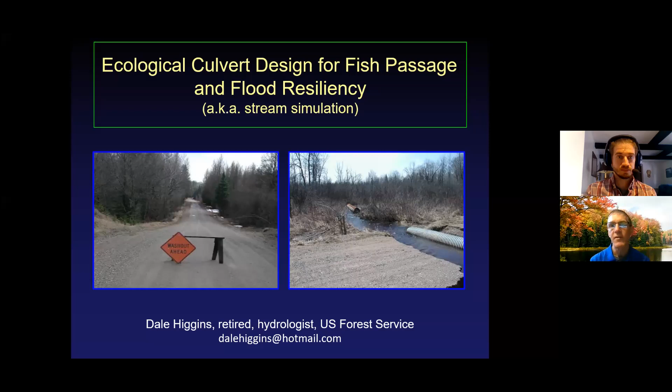And I'd like to start out with a little story.

Chris mentioned I'm retired, but I worked for 38 years for the Forest Service, and the last 20 of those on the Chequamegon-Nicolet National Forest in northern Wisconsin. My whole career worked on road stream crossing problems, but especially those last 20 years, spent a good share of time on those problems in northern Wisconsin in particular.

And so over that 20-year period, probably 7 or 8 years into that, we were replacing roughly 12, 13 crossings a year. I thought we were doing a fantastic job. It was a lot of work, kind of getting ready to pat myself on the back.

And then I did a very simple math calculation. I knew we had roughly 1,000 stream crossings, maybe more on the forest. So I took that divided by 12 and a half, and I came up with 80 years. So it struck me that our structures need to last 75 to 100 years at that rate. So the point is that...

I'm getting quite a bit of feedback, thanks. So the point is that any structures we put in the ground today, just from an infrastructure standpoint, need to last at least 75 to 100 years. So you've got to think immediately about lifespan, and they have to be flood resilient.

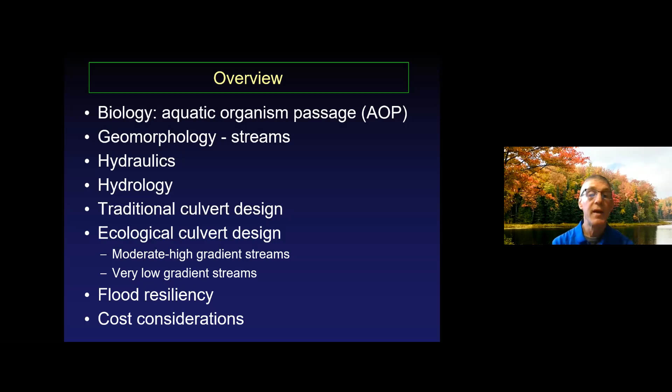We'll go into a little more detail on some design concepts for those two topics, touch on some of the flood resiliency aspects, and then just at the very end, no economist, but touch a little bit on costs. So I'll go ahead and get started.

Just talk a little bit about fish and aquatic organism passage. A few of these slides I borrowed a while back from Mike Miller with DNR. And the point is that species, whether it's fish or other species, they have a variety of needs to meet their life cycles. And rarely are all those habitat needs provided in one place. So they've got to move to get to them.

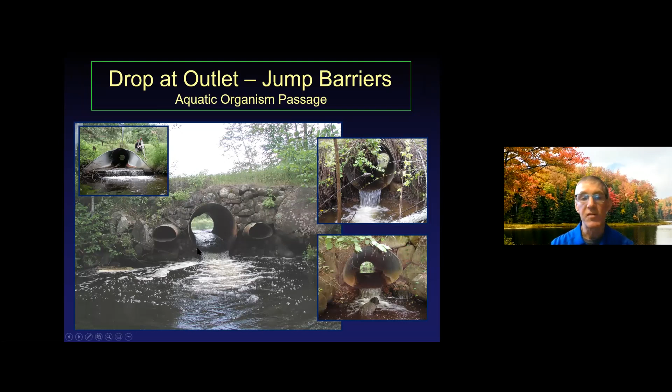And of course, that certainly applies to fish, aquatic organisms. And road stream crossings frequently become barriers for movement. Example here of traditional culvert design gave us a lot of these types of structures with a barrier jump at the outlet where species might have to jump that. Even if they can make the jump, the water in the culvert might be too shallow for them to swim through, or too fast.

The classic example of species maybe requiring to move are brook trout or other trout, game species that either need to seek out spawning grounds or colder water temperature or overwintering areas. But I'd like to, if you're not aware of some of these, broaden your horizons a little bit.

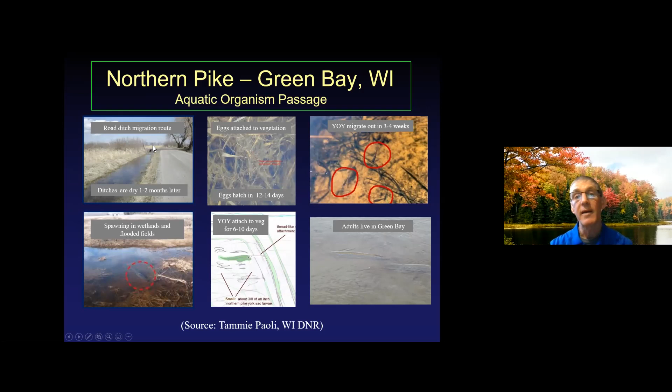Northern pike spawn up, move up ditches like these. They get into wetlands and flooded fields. They spawn. Eggs hatch in 12, 14 days. And then in 3 to 4 weeks, the young migrate out. Within a month, the ditch is dry for maybe 10 months out of the year. So it plays an important travel route for northern pike, not only out of Lake Michigan, but maybe this is probably happening everywhere.

So the take-home story is that we know a lot about fish and fish movement, but we don't know everything. We keep learning more. But species really determine when they want to move and in what direction they want to move. So I always feel like we should provide them the opportunity to move when they want to move. The same thing applies maybe to turtles.

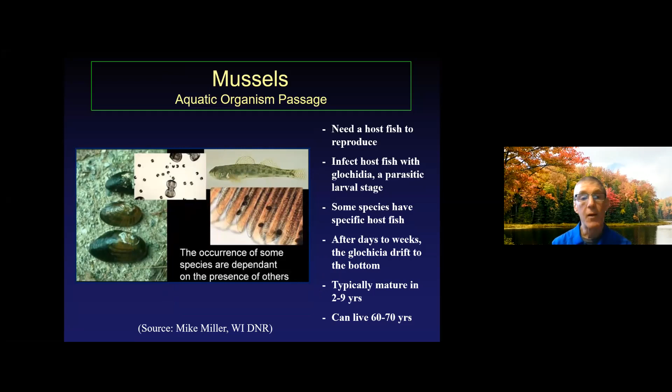They need to move, and if they can't get up through a culvert and get forced up over the road, especially in areas with high traffic, it can become a killing field. Species you don't think about moving are mussels. They're pretty sedentary, but in their life history they expel something called glochidia, which attach to the gills of fish, and then the fish can move upstream. Eventually they'll drop off and mature into adult mussels.

So a whole variety of species move. There have even been examples of mayflies, amphipods, and snails moving upstream. The bottom line, I think, is the best way to look at it is to provide them the opportunity to move when you can, and let them decide when and what direction they're going to move.

I want to go back to that first slide where I talked about the need, from an infrastructure standpoint, for structures to last 75 to 100 years. If we put in a structure today, it's going to be out there for another 75 to 100 years, and if we don't get the aquatic organism passage right, those critters in that stream are going to live with those consequences for a long period of time.

Okay, so next I want to move on to stream geomorphology, and there are some important concepts we need to consider as background for later in the presentation. I want to start at the big scale and talk about the fact that stream networks develop in watersheds in response to geology and climate. Geology is kind of the template the stream network develops in. Climate provides the water, which produces runoff, which runs downhill, right?

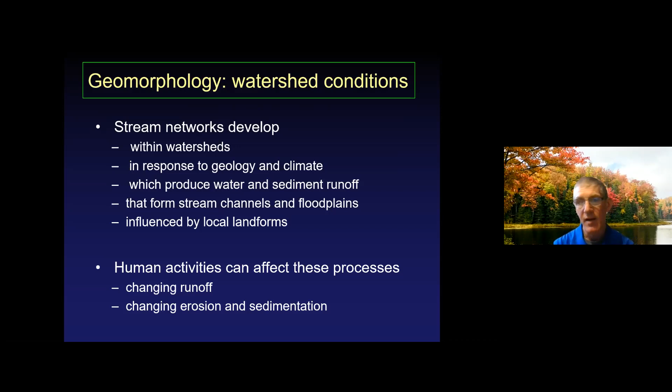But not only does water runoff form channels, so does sediment movement. So the combination of water and sediment runoff works to form stream channels and floodplains. Just a simple overview. So if we step down to the stream level, I want to emphasize the importance of streams not only moving water, but sediment and even wood and organic matter. In doing that, they form and maintain stable features.

You'll hear the terms dimensions, patterns, and profiles. Dimensions would be, say, if you look at a stream in cross section, the width and depth of the stream, maybe the width and depth of the floodplain. Pattern would be sort of the plan view of a stream: is it very sinuous, or is it straight? Does it have a very narrow floodplain? And then the profile would be the slope.

So a key feature, a lot of you are probably familiar with this, is the term bank full flow and bank full channel characteristics. That's a key concept I'm going to use in ecological design. So what are we talking about in terms of bank full flow? It's probably the flow that is most important in forming and maintaining the channel.

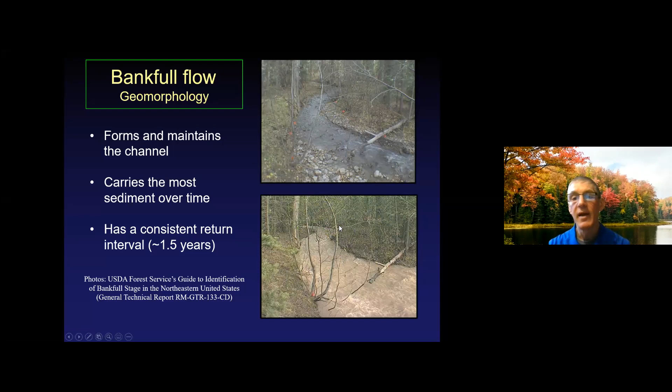Here's an example of what we're talking about. It's defined as just filling the channel before it flows over into the floodplain. So if you can see the flags in this example here, that would be your bank full channel. So we're at low flow. Usually one good place to see it is on a point where you come up and then it flattens out onto the floodplain. So here the stream is just about at bank full flow.

A couple other examples of how to identify bank full. It's that first depositional flat adjacent to the main channel where the stream will start to flood out. So here's an upland situation. You come up this bank and all of a sudden there's a break right along here and you'll have this flat. That would be the floodplain. This would be your bank full elevation, or at least the first point you would look at.

Here's a diagram of what that looks like in cross section. So here's your bank full stage and bank full width, channel width, and the flat adjacent to it - that's the floodplain. You can calculate an average bank full depth, area, and also maximum depth.

If you're familiar with Rosgen's stream classification system, you'll hear the terms flood prone width and entrenchment. Flood prone width is, as a rule of thumb, take the maximum bank full depth, double it, extend a line across to where that intersects with the uplands - that's the flood prone width. Entrenchment, which is a value a lot of people use, is just this flood prone width divided by the bank full width. So it's how wide the floodplain is in terms of bank full width. In this case, it's probably about 2.

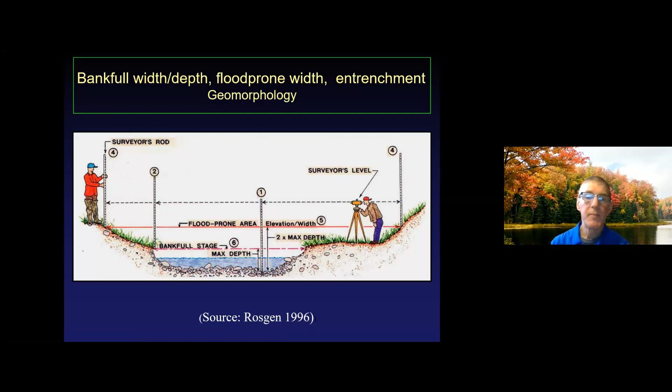So enough on channel geomorphology, just quick background. I want to touch on some culvert hydraulics to make sure we all have a common understanding of a few terms.

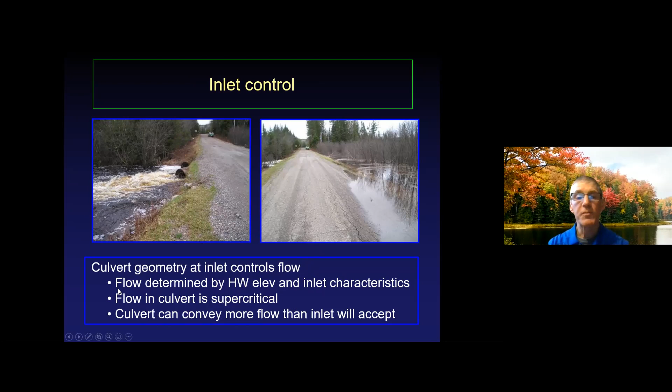In terms of culvert hydraulics, you'll hear the term inlet control. That means the only thing determining flow through the culvert is the headwater elevation and the inlet characteristics. Flow in the culvert can be supercritical, and usually the culvert is set at a steep slope, meaning the culvert barrel itself can convey more water than can get into the inlet. So if you're thinking about pressure on your road crossing, abrasion in the pipe, or fish passage, supercritical flow is a problem.

Outlet control is kind of the opposite—the tailwater really determines the flow through, along with a number of other characteristics. Flow through the culvert can be subcritical, meaning the inlet can convey more water than is flowing through the barrel. This is certainly the type of thing we'd like to see for aquatic organism passage.

A couple notes on hydraulic analysis—I don't have time to go into much detail, but this book, Hydraulic Design of Highway Culverts, Hydraulic Design Series 5, or HDS 5, is like the old Bible. It goes way back to the 1950s and has been updated several times, but that's what was used before the advent of computers and computer models. A lot of this still forms the foundation for those computer models, which are basically just computerized solutions using these same techniques.

There are a number of models available. Before today's computers, HDS 5 had nomographs you could use to help solve for inlet or outlet control. Now there are a number of computer models—I'm going to talk briefly about one, HEC-RAS. The U.S. Army Corps of Engineers has a Hydrologic Engineering Center, that's the HEC part; RAS is a software package called River Analysis System. They have a number of really good software packages in the public domain, and this is one that's commonly used. It's a floodplain modeling program, but it has really good routines for culverts and bridges.

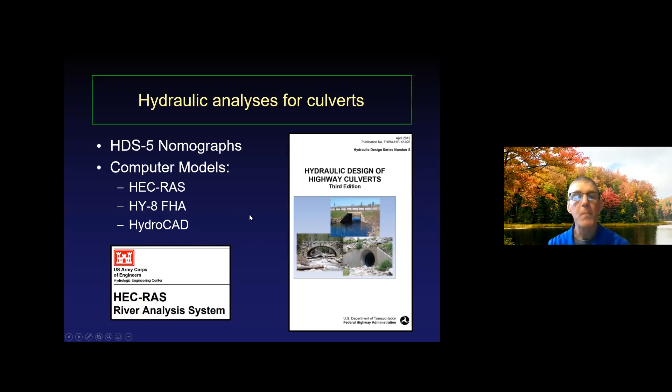As you're putting your geometry data in from your survey, you put in the elevations for the culvert, and you also have to pick your culvert size. As you're picking those, there are actually links back to these chart numbers, so you can make sure that the structure you use fits quite well.

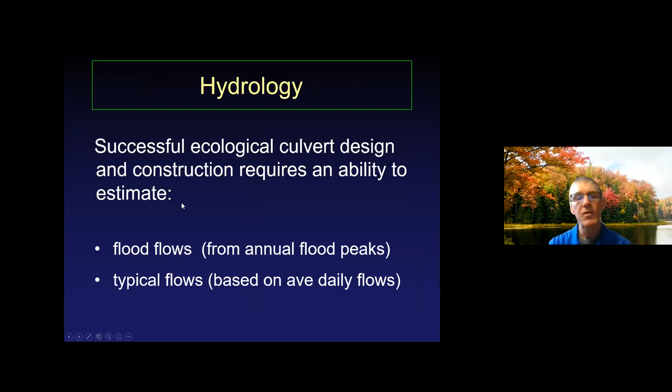I'll throw construction in there too. You need the ability to estimate some flows, in particular flood flows, but maybe in other cases, more typical range of flows, especially for bypass pumping or something. So just a little bit of background work.

There are two basic ways to estimate discharge at your road stream crossing site or any other site. One broad category would fall into what I'd call rainfall runoff modeling.

That's where you pick a design storm, a rainstorm, which could be a 25, 50, 100-year event. And then with rainfall, you also have to think about, well, what duration? Is it a 6-hour rainstorm, 12, 24, etc.? And then you can get a design rainfall amount. You drop that on a watershed, figure out how much is going to run off, and you can get a peak discharge from that, and even a runoff volume, and then you model that, size it. There are some really good methods, so it's a reasonable way to go about it.

But the one drawback to me is that it doesn't take into account snow melt. It doesn't necessarily take into account 2 or 3 or 4 or 5 days in a row of 2 to 5-year storms. So the other approach, which I like to use and will talk about, is basically transferring data from streamflow gauging stations, because that's really what you're interested in: observed flood flows. I'll get into that in a lot more detail.

So that's all I'll say about rainfall runoff modeling. I'll cover this other aspect today.

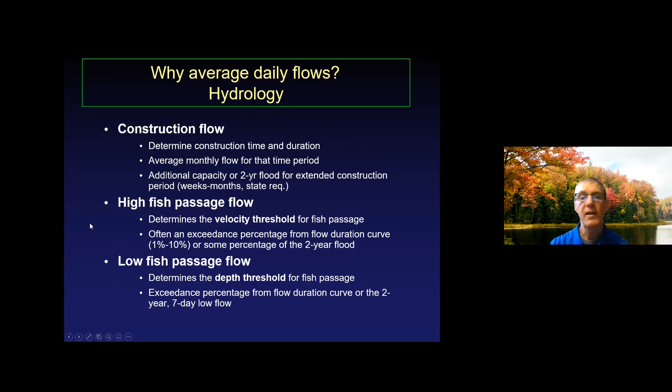We may or may not need average daily flows, but one area you might use them is if you're thinking about construction and what kind of bypass flows we may have, accommodating that with pumping, a diversion pipe, or diversion channel. If you want to do fish passage modeling, we won't spend time on this now, but later John Simonson will talk about inventory. If fish passage is a concern, sometimes it's obvious whether you have it or not, but some cases are indeterminate, so you can do modeling and need to pick out flows to do that.

So how do you transfer flood flows from USGS gauges to your site? Sounds like a lot of work. The good news is the U.S. Geological Survey, who operates all the gauging stations in the country, has already done the vast majority of the work for us. At every one of their sites, once they have a sufficient number of years of data, they'll do a statistical flood frequency analysis, identifying what the 2, 5, 10, up to 100-year flood is.

So how do you extrapolate that? They've developed methods for doing that too. They delineate every watershed and determine a number of watershed and climatic characteristics. Then they perform a regression analysis to predict flood flows from those climatic and watershed variables, regionalized by state. So they've done all that for us, which really simplifies our job.

In addition, they've developed a computer program that solves the equations, containing all the equations for a state. It's called NSS, and you can download it right here.

As they do these analyses and develop equations, they typically do it state by state. As they update the equations—this one is from Wisconsin, 2003—they describe all the gauges in the state, their statistical analysis, the whole works, everything is here. So if you're going to use these regression equations, it pays to get these publications, look them over, and make sure you understand the limitations and assumptions. Again, from this website, you can download the publication.

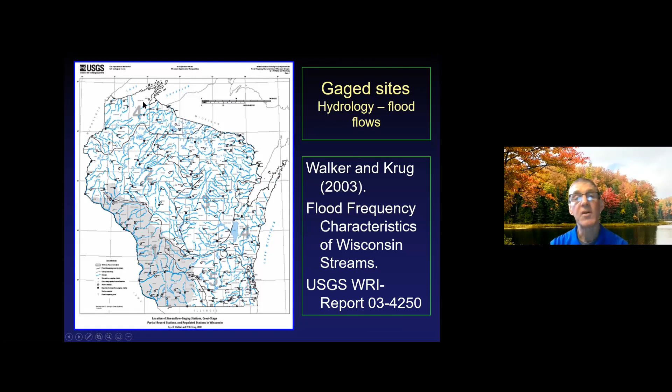Here's an example, still from 2003, a map of the state. The open circles are partial record crest gauge stations—there are a lot more of those because they're cheaper to operate. Then there are some continuous recording stations. You'll notice the state is broken up into 5 regions, because regionalizing gives better regression fits, so they have separate sets of equations for each region.

One nice thing about this statistical approach is you can plot these up. This is an example for Brookside Creek and Brookside Road near Green Bay. Because it's a statistical analysis, they also publish the standard errors, so you can plot those too, giving you some sense of the potential error in your flood flow estimates. So beware of those standard errors and the possible error in your prediction.

I mentioned I like these regression equations—I think they have the potential to be a lot closer to the true value compared to rainfall runoff modeling, but you can still have fairly substantial errors. Be careful, because in those publications they'll state the range of data used to develop the equations, and your watershed may be outside that range, which increases the potential for error.

One last note—a lot of them, like Wisconsin, start at the 2-year flood. I like the 1.5-year flood, so I simply extend the line down to get the 1.5-year flood. Quick and dirty way to do that.

So how do you go about using regression equations? Pretty simple and straightforward: you delineate the drainage area, determine the watershed characteristics, and solve the regression equations. In the old days, you'd have to get GIS layers, delineate the watershed, and overlay it with the watershed characteristics needed for the regression equation. Then you could solve it with spreadsheet equations or the NSS program.

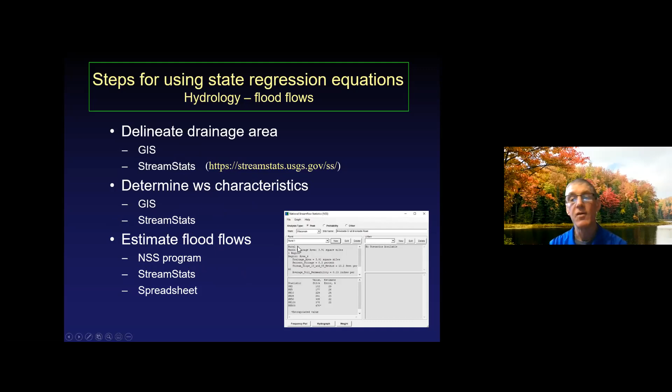Some states will even solve the equations. Wisconsin's not there yet, so you still have to use this NSS program on your desktop or a spreadsheet, something like that. But pretty simple and straightforward.

Here's an example, that Brookside over by Green Bay, a long, narrow watershed delineated the old GIS, 3.9 square miles, for the regression equations for that part of the state. You need storage, channel slope, soil permeability, and mean snowfall, which you get either off the maps or from the publication.

This is just an example of what a few of the equations look like. Every area has its own set, with equations for the Q2 through the Q100. So you need area, storage, slope, soil permeability, and snow for that particular site.

The solution: the 100-year flood was 380 CFS, and you can see the other numbers here. One thing I like to do, and it's a little crude, there are a few things you still have to take into account, but I'll divide that by the drainage area to come up with almost 100 CFS per square mile.

So as I move around areas of the state, I get some ideas - is it a flashier or more stable system? And I have some other examples like that for you to see and think about.

So the next thing I want to do is hydrology. You may or may not want to do this, but it's something else to think about, and it gives you a feel for the hydrology system. So say you want to think about bypass flows during construction.

So the thing to do is the obvious thing: when will construction occur? Do we know? Because flows are seasonal. Determine the length of construction - can you get in a day or two, or is it going to be a month-long job?

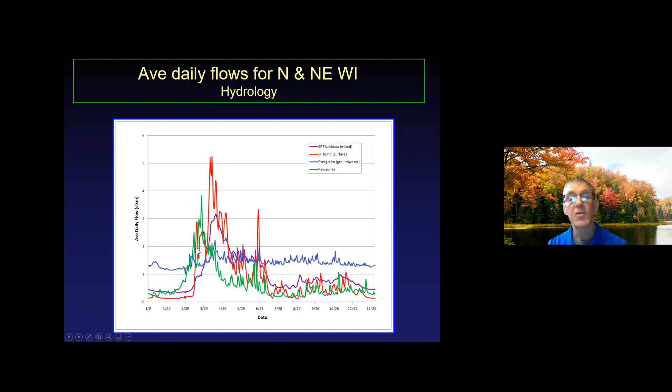Similar to the mixed type, except it peaks a little lower, or about the same but a little earlier, which makes sense given it's a bit further south, and the base flows are a little lower. You can use this to get an idea of the construction period flows per square mile, multiply by your drainage area, and it gives you a starting point. Here's an example that generalizes monthly flows by averaging a number of groundwater fed, mixed, or surface systems, or 4 gauges in the Green Bay area.

For that Brookside example, say our construction was going to be in July. If it was later, you might even have lower flows on average. So at a minimum, we'd want to be able to handle about 1/4 CFS per square mile times almost 4 square miles. That's a good starting point, almost 1 CFS.

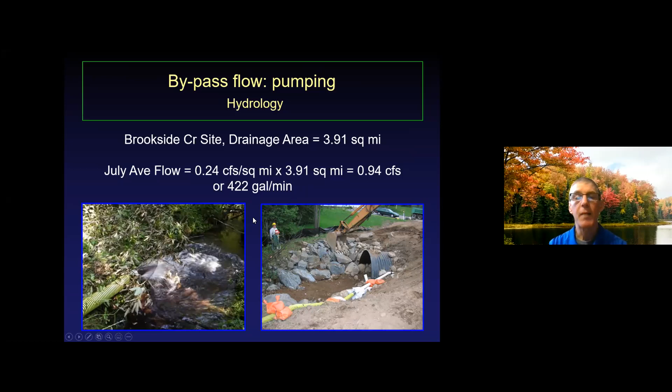Or if you wanted to pump, say it's a small system, you can get in and out in a few days. Maybe you need a pump that would do at least that, with more reserve capacity in case flows are higher at that time of year. Certainly as the construction time approaches, you can adapt accordingly, but it gives you a starting point.

Another example: say you're going to be there for 3 weeks or a month pouring concrete and other things, and you think there's a good chance of storms and higher runoff rather than the average or base flows. Then maybe use regression equations for a 2-year flood, in this case 135.

So you're going to put in a diversion pipe and set it steep, and you're willing to, since you're only going to be there a few weeks, not worry too much about fish passage or abrasion, that sort of thing.

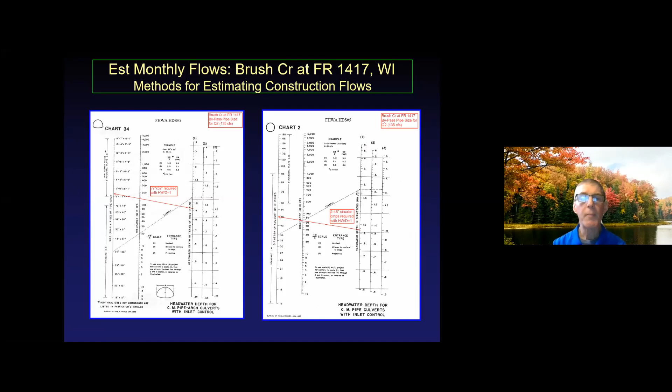You can also do some of this in HEC-RAS, but it takes a little more work, so it just depends on how much time and effort you want to put in. At least it gives you a starting point anyway.

Now the next thing I'll do is talk briefly about traditional culvert design. That's essentially based on hydrology and hydraulics: select a design peak discharge, and of course think about the headwater depth ratio. You get a survey, perform some type of hydraulic modeling to pass that design discharge, and ensure you meet your engineering constraints.

The other thing I want to mention is the importance of design standards and headwater to depth ratio. These are minimum standards, so they can go beyond this, but Federal Highway Administration uses a 50 or 25-year flood with a headwater to depth ratio less than 1.5 or 1.2, depending on road type and culvert size. Wisconsin is pretty similar, 25 or 50 year for streams, depending on road type, with headwater depth ratio less than 1.5 -- letting a pretty good head build up on the structure.

And then NRCS, Natural Resource Conservation Service, working with private landowners and farmers, uses 2, 10, and 25-year flood standards for forest access roads, farm driveways, and public campgrounds.

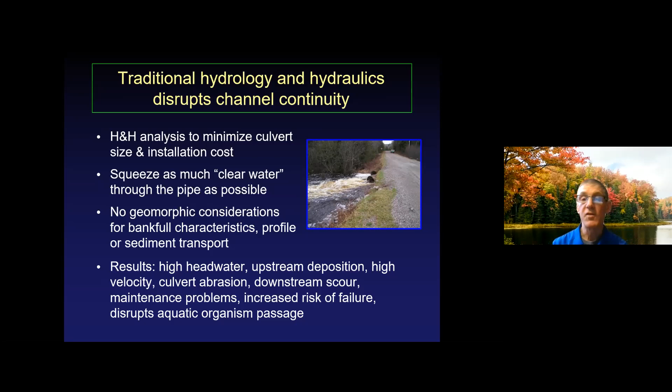So that leads me to, what's a culvert designer to do, a road stream crossing manager to do? What I'm going to say is use ecological culvert design, also known as stream simulation. Or if you want a corollary to H&H, I would call it BGH&H: biology, geomorphology, hydrology, and hydraulics.

So what's ecological culvert design? Simply: structure width greater than or equal to bankfull width, structure wraps around natural channel, passes all aquatic species and life stages, maintains stream continuity in terms of the movement of water, sediment, and even woody material. And that results in a very long-lasting, flood resilient, low maintenance structure.

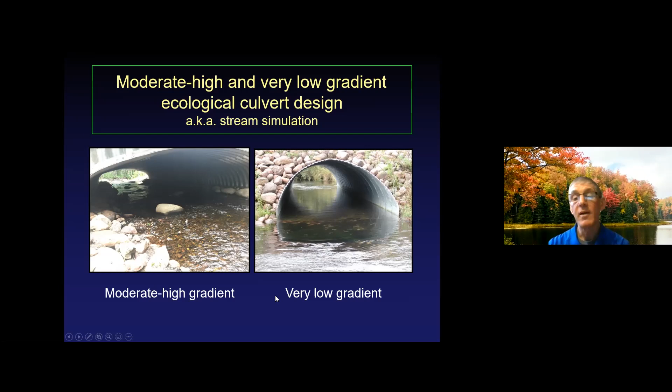So one of the things I'm doing, I've kind of broken this ecological culvert design into what I'll call moderate to high gradient streams, versus very low gradient. Classic stream simulation is like this: you build a stream bed through the structure, wrap the structure around it. But at least in northern Wisconsin, through trial and error and starting to work in this direction early on, we found that maybe on these very low gradient streams, you don't always have to build bed and banks through it. So what are the key considerations to separate those two?

Obviously gradient is one, but the key is that you have a natural backwater, tailwater, whatever turbulence through that backwater up through the culvert. The other key one is what kind of mobile bed do you have? If you have a mobile gravel bed, don't build the bed and banks through it. But if it's sand or organics moving through the end, and you have this natural tailwater, you might be able to get by with what I'll call the very low gradient approach. There's no exact slope breaks because it depends a lot on the details, especially the culvert length and the actual slope, but very low gradient you start getting below 0.5%, moderate-high gradient above 1%, and it depends on a lot of these details.

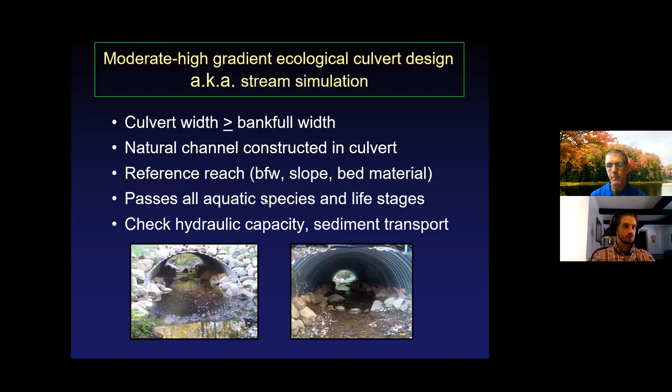So, to do any design, you need to do a survey, right? But from a stream simulation standpoint, we like to use the term site assessment. You can actually do an initial site assessment before you even get on the ground, using existing information, maps, books, Google Earth. You can learn a lot in a short period of time, so you know what to anticipate out there. Some of the examples I have here for a design are from a stream down near Platteville, Roundtree Creek. It was used for a design course down there for about 3 years.

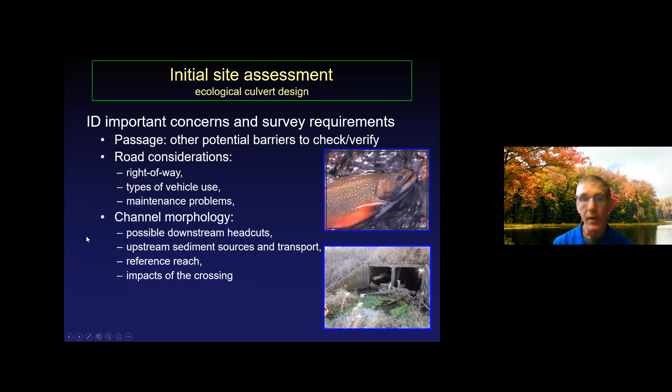And then also you can upfront start to identify important concerns, like passage, road considerations, channel morphology. If you can start to identify those upfront, when you go out to do your survey, you're more likely to collect data that will help you address those concerns. And then even early on, you can start to develop preliminary objectives for passage, road design, channel morphology considerations, that sort of thing.

So, you head out in the field to do your survey. A couple things you definitely need are a stream profile survey, and we're going to say 20 to 30 channel widths in each direction, upstream and down.

You need a number of stream cross sections. I'm going to say minimum of 5 for hydraulic modeling, more is better. And then also for your reference reach, you need at least one, and then some other bank full width measurements there. You need obviously some survey of your road, so you can do all the engineering aspects for the road itself, culvert replacement.

These days, almost everything's done with a total station, so you can get a good topographic survey around the crossing itself and then pick up all these other features.

The other thing I would highly recommend, and if you're like me, I'm not an artist, so I always want to resist doing this, but do a site sketch. And there are two reasons for that. One, it forces you to observe more if you're trying to draw something.

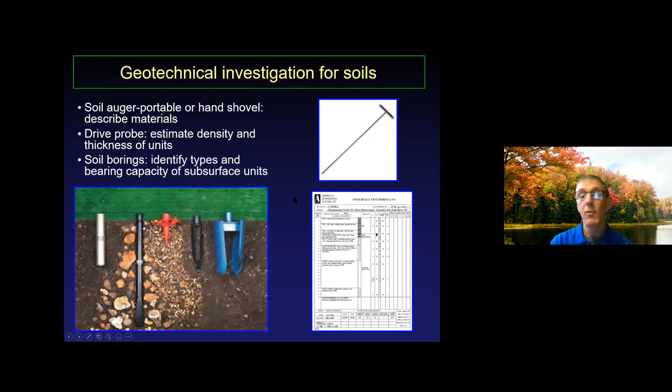I won't say much about geotech investigation. Sometimes you can do some initial stuff yourself, or if you know a soil scientist, some engineers, a geologist, they can help you look for some of these things that can be a real problem from a structural standpoint. The sooner you identify those things, the better. You can do that sometimes with a soil auger, hand shovel, there's even a drive probe you can use for some things. And of course you can step up to paying someone to do soil borings and geotechnical investigation, which for bigger structures is probably what needs to be done. Hopefully you have a structural engineer who can take care of that for you, or you can consult with one. So let's now step into some of the design aspects, but also include consideration of some of the survey details.

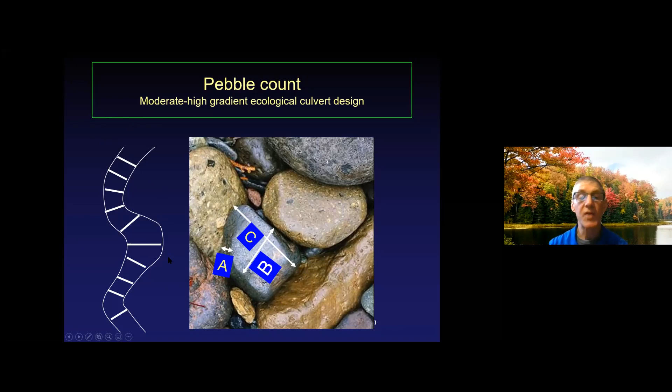So you systematically pick up 100 of these, measure this axis, and then you can plot a cumulative particle size distribution. Usually the measurements are made in millimeters, but you can convert those to inches. Then you can start to break this up into logical groupings and size classes.

So this first line is like 3/4 inch minus. You could bring this across and say, for our bed, we want 28% of our bed material mix, whatever volume we need, to be 3/4 inch minus. You always want at least 5% sand or finer so you can fill in some of the voids in the sub-bed, so the base flows won't go subterranean and become a fish barrier. Then you can say, we want 22% from 3/4 inch to 2 inches in size, 20% from 2 to 4, and you get the idea.

And then you can go to a quarry or gravel pit and specify the volume you need in all these different size classes for your bed mix.

The other thing you need to do is build banks. We won't get into specific bed features and all that, but you might need some larger stable material for the banks and some of the bed features that stay stable throughout the life of the structure.

So your first estimate is finding what are called key pieces. You want at least 10 of those, maybe as many as 25. Measure those, and it really pays to measure the A, B, and C dimensions, and they'll serve as your basis for the stable rocks in the structure.

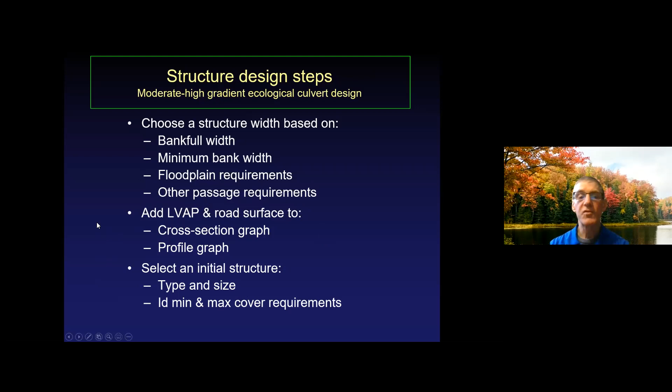We're going to look at something called an LVAP, lower vertical adjustment potential, in a few seconds. Select an initial structure ID or min-max cover requirements, where you can put your footer invert, verify cover, and think about your end treatments and the length of your structure. What kind of side slopes are you going to have? Are you going to have headwalls or anything to get your structure length? It's sort of an iterative process, and then eventually you do your hydraulic capacity check and your sediment mobility stability check, and you refine things as you have to.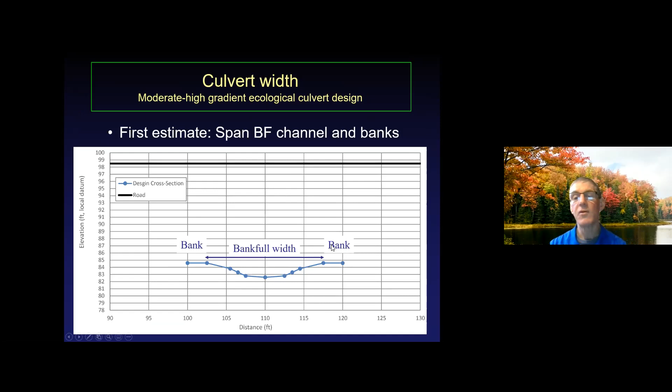Here's a typical profile from the reference reach, 15 feet wide. You want good stable banks, so maybe rocks up to 2.5 feet on each side, which gets us up to a 20-foot width there. So you can put the LVAP on here.

In this case, with this size structure, it seemed to make sense to think about some kind of a ConSpan as one option. Here's a 20 by 8 foot ConSpan that could be set on footers, in case you want the footer to extend below that lower vertical adjustment potential, come up to bank full.

So why bank full? Well, that way you can put in your footers and build this entire bed where it's open. You can get at it with an excavator, heavy equipment, much easier to build. You can build inside the structure, but it's easier, and then put the lid on, backfill, and that sort of thing. So it's a nice way to go.

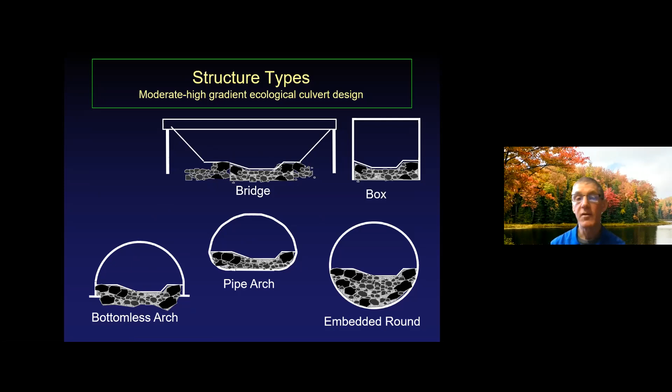Here's an example of that whole concept again, a lot of structures can work. This channel is identical in all these structures. What differs is maybe the amount of floodplain. As long as you meet your LVAP cover requirements, theoretically any of these structures could work. Two are bottomless, three have bottoms in there. So it's that idea of designing your bed, meeting your engineering constraints, and selecting a structure that works best, and maybe at least cost.

Some real life examples from Northern Wisconsin, these three have inverts and bottoms, these three do not.

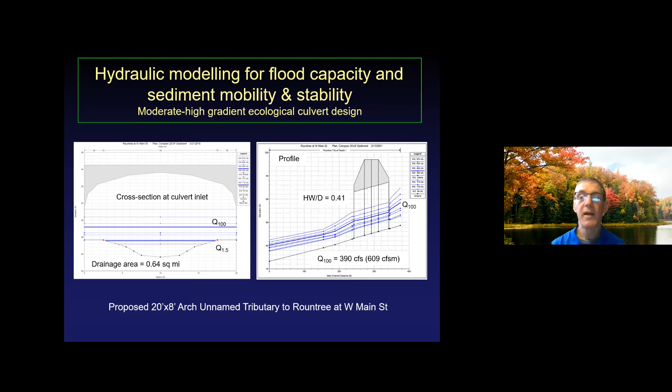And then you can use the hydraulics to do that sediment mobility, stability analysis I talked about. The idea there is you want your particles to be stable. The big ones have got to be stable across the whole range of flows. You want the basic bed, like when it starts to mobilize at whatever flow in the reference reach, you want it to mobilize in the structure too, so that it maintains that continuity of sediment transport.

So I have a summary here, but I'll leave that for your reference on the design steps, and then I'm going to move on to what I'm calling the very low gradient considerations and design.

So again, you might only want to do this where the stream is transporting sand and organics, not a mobile gravel bed. You don't want a culvert that's greater than or equal to bank full width. And if you're not going to build bed and banks through there, the idea is that the size of the culvert sort of acts as the bank, so to speak.

Got to get it set at the proper elevation, analyzing the stream profile. Part of that is determining that you have natural backwater that provides good depth and low velocity for AOP. I call that good D, low V for AOP. And then still verify hydrology and hydraulics at headwater depth ratio 0.8. You want to pass at least the 100-year flood.

And then while in some cases you may not need banks, there are times when you may need them, or you may wish to add them, or you may need to do some stream restoration also.

So from a site assessment standpoint, not a lot to say other than you don't have to worry as much about the bed materials if it's sand, but man, the profile—find a good reference reach for your bank full widths, and you really got to analyze that profile, especially for prior impacts. A lot of these existing structures have impacted the channel morphology upstream and down, so you got to consider that with your replacement.

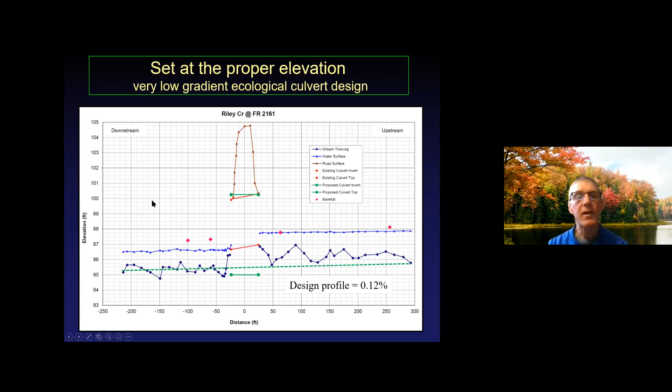So the culvert was both a constriction, I don't know if I pointed it out here, it was 68% of bankful, so that's constriction ratio. But it was also set high. So what would happen if we took that same culvert set lower? Well, you still see what the constriction does, and this is better. And this is better than some crossings I've seen, but still doesn't meet the criteria.

So even at a 2-year flood, the culvert is almost full, and as soon as you get above that, it starts to pond water back, and it had a headwater depth ratio of 1.5.

So if we go to bankful width culvert, just barely to the minimum bankful width, a little over 7 feet, all of a sudden we're passing that 100-year flood with a headwater depth ratio of 0.65. If you want to think in terms of flood flows, so pretty moderate flood flows, only about 25 CFS per square mile. And this is very typical in northern Wisconsin, where we have these sort of moderate 100-year flood flows, and we get a bankful width structure. Usually we will pass these flows with some freeboard here, in less than headwater depth ratio of 1.

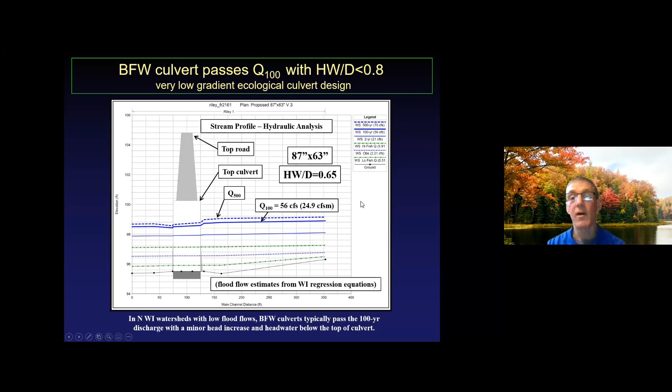Talk about skew again. Here's kind of a borderline situation, and the problem is in the connection between profile and alignment. We have a stream coming down here that follows the road, probably was channelized, put in a shorter culvert, turns, does a 90, comes through here, heads downstream. So the ideal thing would be, gosh, could we reconnect that? That would be a nice way to go. You have better alignment at the inlet.

The problem is you're going from, these were two 8-foot, 45-foot long concrete pipes with a rock head wall that was failing. They were starting to separate. So the problem is all of a sudden we have to go to almost a 100-foot culvert. And then, do you need to build a stream bed through it? The conclusion was, yes, we would have had to.

If we tried to put in a flat culvert, it would have been buried too much here, causing a head cut upstream. We were at that kind of break line on a slope of 0.6% using the water surface. If you set the culvert at a slope, it would have been too shallow here if you're thinking this is a stable grade control. So you either do this, build a full bed through it, a long culvert, more of the stream in the culvert. This channelized section looked like that was pretty stable.

So the other option was the gradient's pretty low through here, 0.17%. That's actually because we weren't aware of any kind of woody debris problem. We went with a 31-foot box culvert right here, 16-foot versus the two 8-footers. So those are the kind of trade-offs you have to think about and you have to make, and you got to tie in the alignment with the profile.

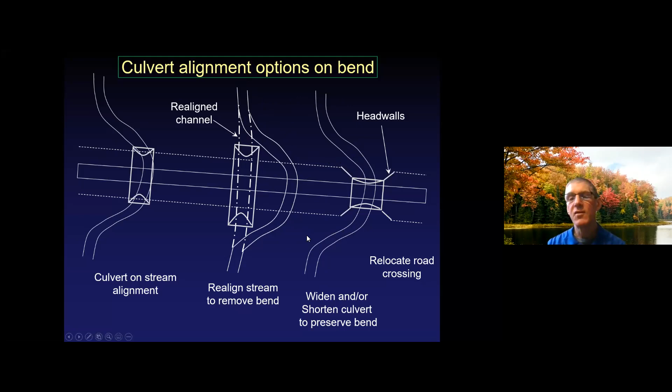You think back to that Lane diagram. If you increase the slope, what can happen? You can cause degradation or a head cut moving upstream. That's what I talked about in the last example. This is pretty good if you can't relocate the road. Ideally, you'd like to cross at a straight stretch. Sometimes you can't do that. This is a nice option, if relocating it isn't feasible.

Here's an example of that. Here's right on a very sinuous, larger, low gradient sand bed load stream, right on an outside bend. Culverts are failing. There were 3 culverts and a head wall. And so no opportunity to relocate the road because of some private cabins nearby. So this box culvert was put in. It's very short, only about one bank full width long.

And so it doesn't really constrict the sinuosity of the channel that much. And what happened was the stream actually builds a point bar on the inside bend, scours more on the outside, can move that sediment through. So it really maintained the continuity. I think the fact that it's so short really makes a big difference in that it spans bank full width. So I mentioned, in a lot of cases on these very low gradient streams, you can get by with the sides of the culvert as sort of the bank. Here's some examples of that, no structure inside it.

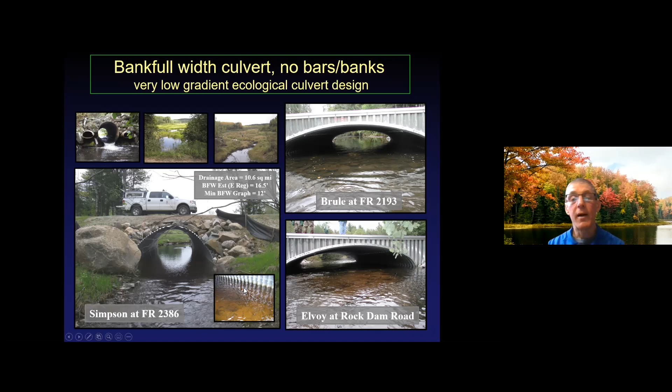As an aside, talk about stream restoration. This old crossing was not only a fish passage barrier, but was ponding water upstream, was class 2 trout stream. You can imagine the water temperatures up here. By putting in larger culverts at lower elevation, restored almost a half-mile of stream, reduced water temperatures, all for the cost of a road stream crossing replacement. Here's this idea, low D, good, or good D, low V for fish passage.

So keep moving here. If bank full width is good, is wider better? Well, not necessarily. Maybe if you're not going to build banks through the structure. Where you have a mobile sand bed, when it moves into a structure, if you don't have banks here, it spreads out uniformly. Here's a good example of that, straight, uniform. And if you have low flows, a real wide structure, that shallow water can impede fish passage. So we certainly don't want that to happen.

Another example in southern Wisconsin: a just under 12-foot bank full width stream moving a lot of sand. You come into this bridge, 16-foot wide, so it's quite a bit wider than bank full. That's good from a flood capacity standpoint, but you can see what happens because of the shade: you don't have any vegetation growing, which is what provides stability for the banks. So the sand spreads out uniformly. It's kind of hard to see, but if you follow my mouse pointer, that's all exposed sand, and there's some over here too, extremely shallow.

So nothing wrong with the span itself, I like the span. I just think building some rock banks through, or some other rock structures, to form a low flow thalweg would be the solution to that. Here's an example of that.

We've got a few cases where we had a co-op project, highway culverts 100 to 130 feet long, 7 to 8 feet, with small groundwater fed streams connecting up to the North Branch of the Oconto River. So we were concerned about that happening, and what we did was build rock structures and tried to place them thinking about scour and deposition, to create some differential scour and deposition around these structures.

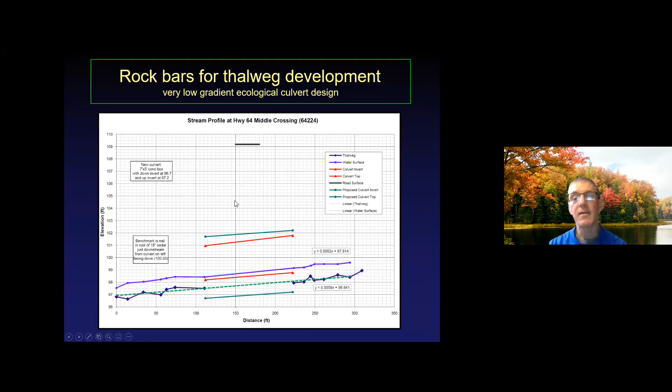Here's an example of one of those sites, culvert before and after, with the sand bed. In this case we set some of the culverts on these very low gradient streams. You have a 50-foot culvert - it's not worth setting at a slope, I don't think, because you're only talking about 5 to 15 hundredths of a foot. But as culverts get longer and the slope increases a little, we were right at that break point, so we did set this one at a slope.

Last topic here is identifying issues up front. This is a cooperative project with two different agencies - a highway culvert at Turtle Creek where not only fish passage but animal passage was identified as an issue by Forest County Potawatomi. They wanted mammals, even possibly deer and bear, to move through here. So 4-foot banks were designed into the structure to provide that opportunity. The earlier you identify those things up front, the better, but those are the sorts of things you can do if you see the need.

One last example of stream restoration on a small stream - look at the stream profile coming up here. Here's the stream with a flat water surface, then all of a sudden, over about a 100-foot stretch, the stream bed climbs 1.5 to 2 feet. The water surface climbs, goes up through the culvert, and is ponded upstream.

What's happened here is this repeatedly failed sediment downstream. The fines may have washed away, but then deposited about 100 feet of road gravel that the stream couldn't move. And upstream, of course, you had organics filling in.

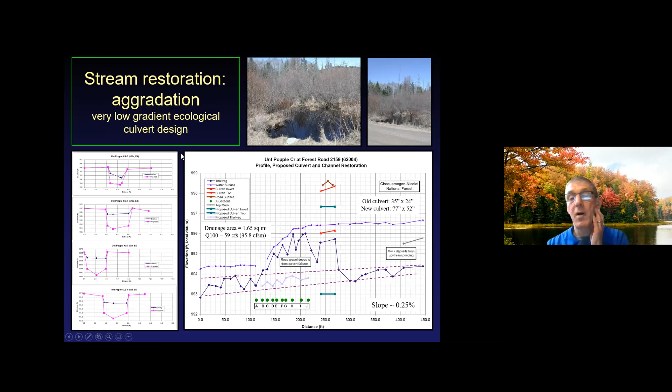The idea is to try to restore the stream profile, put in a bank full width culvert set 3 feet lower, and remove some of this material. These are the cross-section locations, and this was our design profile - going from these cross sections down, excavating about 1.5 feet of material to try to restore the profile of the stream. Sometimes you'll run into these things and have to make that decision about whether we'd like to restore the stream profile, the continuity of the stream, and that sort of thing.

So that about does it. I've got a little summary here, but I'm not going to spend any time on that.

I'm going to keep moving and talk about flood resilience and ecological culvert design. I think it's pretty obvious why they tend to be much more flood resilient, and that's because of the greater flood capacity and freeboard. Here's another example: Q100 headwater depth ratio of 0.53.

Lots of freeboard capacity here. Again, flood flows for almost a 5 square mile watershed - this was an 11-foot wide culvert.

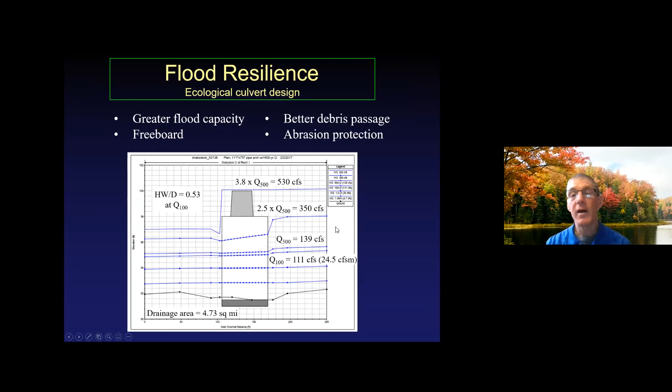Flood flows are pretty moderate, down around 25 CFS per square mile. But the other thing stream simulation and ecological culvert design does is it helps with woody debris passage. I'm going to reference a study here from California. I'm not aware of that many studies on wood passage, but here's one from the early 2000s, Northwestern California.

But the thing I want to call your attention to is this box culvert here, and look at the debris piled up, two cells. You see so many times where you have multiple culverts or multiple cells. I haven't really talked about that, but one opening that's at or at least beyond bankfull width will help tremendously. If you go multiple openings, you're just creating a failure problem and a maintenance problem.

So they did a number of things in that study, and they looked at a culvert plugging map, but they identified over 3,000 pieces of wood that moved. 99% were shorter than the channel width, which kind of makes sense, that most pieces moving, if they're longer than bankfull width, will start to get hung up. So that's a good thing, but there are some that move that are longer than bankfull width.

So I'm going to go over their major conclusions of what will promote wood passage, and stream simulation or ecological culvert design pretty much ticks all these off: no headwater ponding, so you avoid this situation here; no constriction, so the vast majority of that wood that's moving can move on through the culvert if it's less than bankfull width; they want freeboard on concave profiles.

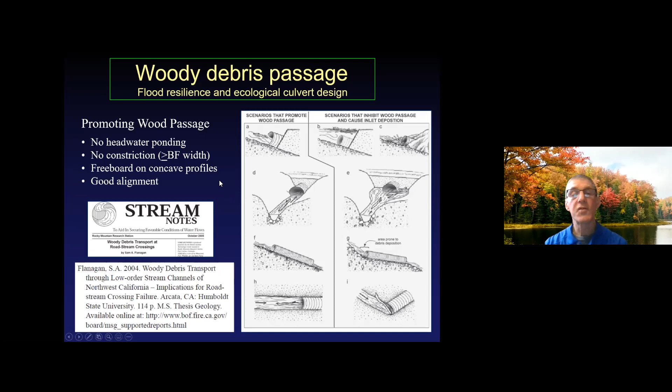So those all help to minimize both failure and maintenance problems related to woody material or woody debris. And then the last thing is abrasion. We've probably all seen this, where this part of the culvert looks good, but the bottom's almost shot from sand, gravel, constant abrasion.

Here's a structure that had, I think, failed or was removed. It had only been in around a little less than 20 years, and all these light spots are sunlight shining through — there are holes in the culvert. So you really need abrasion protection if you want a flood resistant culvert that's going to last 75 years or more.

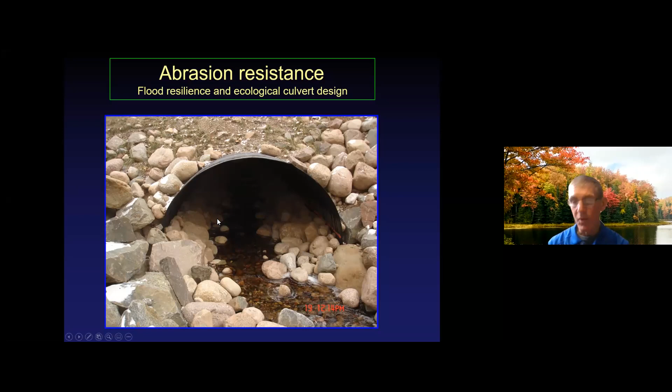Ecological culvert design will give you that, especially if you build a bed and banks through here. But even if you have a natural sand bed that develops, it can provide much more abrasion resistance, and really extend the lifespan of the culvert. So what I want to say in conclusion is that using ecological culvert design, stream simulation, will get you a long, long way towards a flood resilient culvert.

But if you think about that range of flood flows I showed you for the 100-year flood, you can think about watershed characteristics. Some watersheds are going to be more vulnerable to flood flow increases in the future if you're thinking about climate change. And hey, we're putting a structure in today, and I want it to be out there in the year 2100 or 2110. So what watersheds are going to be more vulnerable?

Well, shallow soils, bedrock, minimal storage, steeper slopes - those are more vulnerable. And then the opposite end of the spectrum are these heavily groundwater fed systems with high infiltration rates - they're going to be more resilient. You can even think about site characteristics: narrow floodplains, steeper channels can move more debris, higher velocities, higher fills, more catastrophic failures, that sort of thing.

So if you have, say, the watershed or site characteristics, you could consider some additional design elements to reduce vulnerability: increasing structure size, providing overflow areas if possible, although in entrenched systems that becomes more difficult, larger riprap higher up or at overflow areas, and concrete structures certainly are more durable.

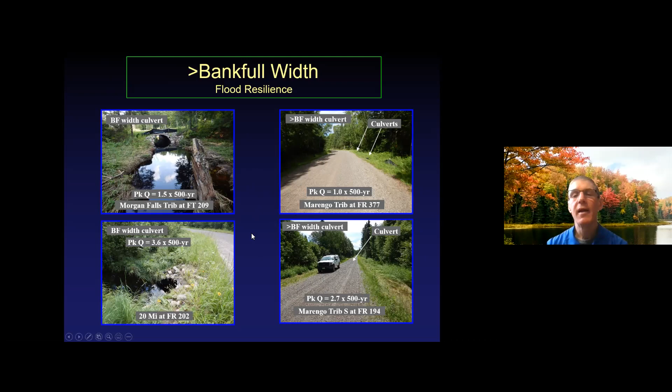One of the things we were able to do during the flood response is at these sites get a high water mark. Because it had been replaced in the last 10 to 15 years, we already had an existing HEC-RAS model set up for the design culvert. So we could run that model, match a high water mark, and get a flood flow estimate. We then compared that to the 500-year flood for the regression equation. Our estimate was anywhere from 1 to 2.7 to 3.6 times the 500-year flood. It's an estimate, and there's some noise in there, but what these experienced and survived.

And so then also where you have slight entrenchment and overflow areas, that helped a lot too. So you have bankful width culverts.

These are two examples, same site, road overtop. This one with the box culvert, just a minimum of sediment, a gravel loss off the road, very minor maintenance. This one, much more substantial loss of gravel, but the road with a little bit of maintenance opened up. Most of the gravel was in the ditch here. And this one, 2 to 3 times our estimates of the 500-year flood. So certainly not designed to handle that, but they survived it in pretty good condition.

Another thing I'll mention: a lot of the smaller streams, we used pipe arches, and we always use a step bevel, with the idea that if you do have any debris moving and it starts to plug, or beaver—especially beaver—there's room for water to get over the top and still get into the pipe, and it gives maintenance crews time to get there and clear it out. Where if it's flush cut, when it plugs up, it's much faster and hard to clean out without damaging the pipe. So just a little bit of an aside.

Another example of that slight entrenchment with overflow is a crossing. It failed in 2013 at not very high flood flows, probably like a 5-year or 10-year flood, and it had failed a few years before that too—so we know it failed at least twice in the preceding 10 years or so. Constriction ratio 0.8. A new culvert was installed bankful width in 2014, and was in the flood area. Here's the modeling for the new culvert: headwater depth ratio 0.68 at the 100-year flood estimate of 69 CFS, for a 0.6 square mile watershed, so around 110 CFS per square mile.

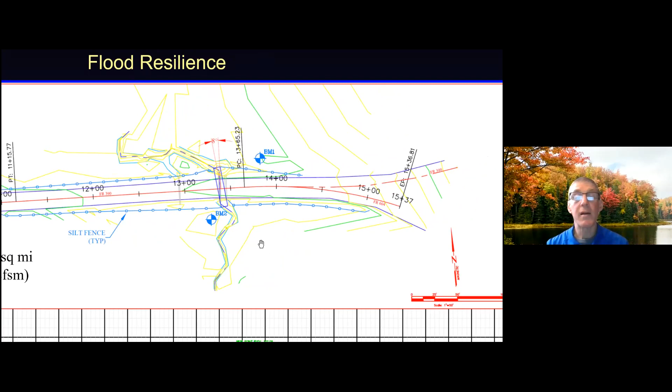This is another example of what that looks like on design drawings—let me try to zoom in here. Here is the plan view of the existing crossing: 3 pipes, 24, 18, 12 inch, washing out all the time. You can see a braided channel from all the sediment downstream. We put in a bankful width culvert, set at a much lower elevation. If we move down here, here's the bankful width culvert, and here are the 3 old culverts, with inverts 2 feet lower. The thing is, it would have stuck out—here's the road profile for the existing road. So we had to ramp up and over, add fill to the road, trying to minimize that as much as possible to get sufficient cover over the pipe.

But we've always said what that does is it provides an overflow area on either side of the pipe. And that's exactly what happened. The 2016 flood did overtop on this side. A little bit of gravel was lost off the road, but the structure survived. So having those slight entrenchment overflow areas really helps.

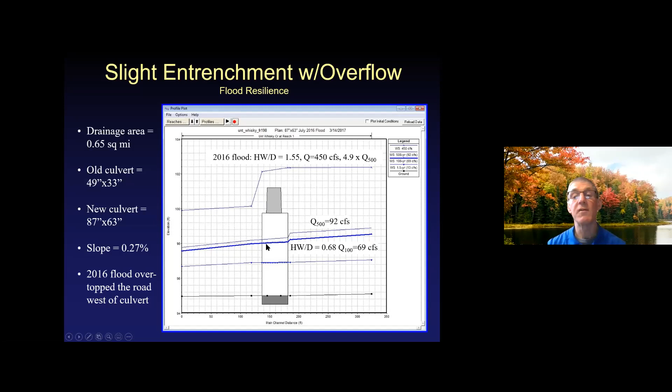But I think it also helps that, going back to here, part of what happens with the bank full width culverts is the tailwater and headwater come up together, and they don't start to separate till you get to a really extreme flood. And even then, the difference is not as great as if you have a much smaller culvert that's constricting at much lower flood flows. So that's the point there.

Comment here, just concrete structures are pretty durable. So these are structures that survive the flood. Here's one with the stream bed constructed through it, Preemption Creek. It's built in 2007, we estimated 1.6 times 500-year flood.

The road actually overtopped a little bit. So we got pressurized flow, which is what we don't want to see. The culvert, sure enough, we lost some of the bed, some of the banks, but the point is these large key pieces, and in particular, this is after the flood, you see these, you don't even see them in this diagram, they're buried in the bed. And they no doubt helped hold things together in some of the larger pieces.

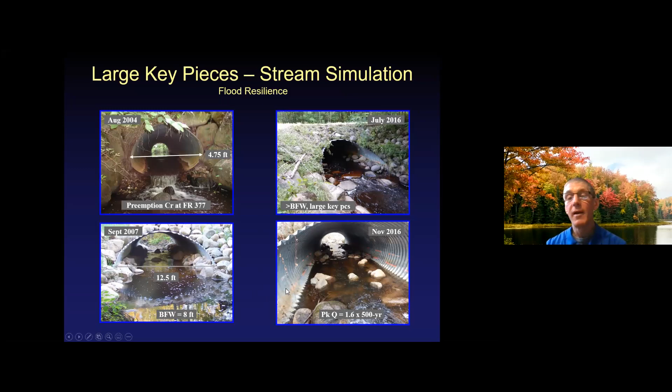There was one of those structures up here. So, but again, to be more flood resilient, a little bigger pieces might have survived even though the full structure overtopped. So with that, I'm almost done. I just have one or two slides to talk about costs very briefly.

I am not an economist, but I know for sure you start talking about putting in bigger structures and it's going to cost more and people get very concerned about costs. So I just want to touch on that briefly.

So here, Bob Gubernick looked at a number of stream simulation structures put in the Pacific Northwest area. And he found for a 50% increase in structure width, so he was looking at like going from 8 to 12 or 10 to 15, the cost of the project went up 20 to 33%. So to me, it's a pretty good deal when you start thinking about the increased lifespan, the ecological benefits, the reduced maintenance. So, you know, I think that's a pretty easy sell.

Another example here, Gillespie et al, this publication I've referenced for that. Hurricane Irene hit the Northeast back, I think, around 2011, but devastated areas in the Northeast. This in Vermont, Green Mountain National Forest. They had installed 3 stream simulation crossings. Most of the area looked like this, but their 3 crossings look like that.

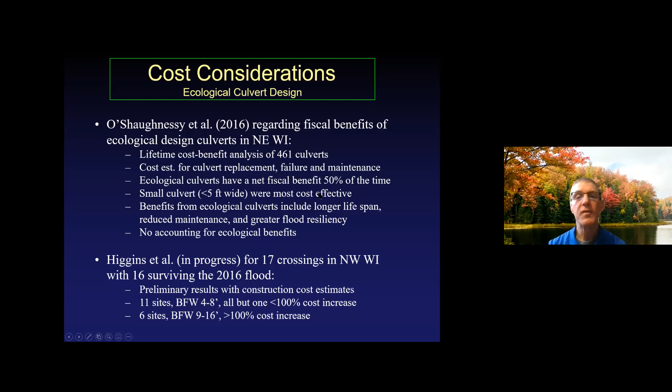It's work in progress, but I would say it's starting to look like it'll mirror these results to some extent. So I'll leave it at that.

One last item I'll point out: Dan Cenderelli, Bob Gubernick, and Mark Weinhold teach a stream simulation course for the Forest Service. It's a one week, 4.5-day course. Usually they try to do three per year. There's no tuition, and they move around the country, but usually a region has to sponsor them. So if anyone's interested in taking that course, you've got to get to wherever it is. Let me know and I can try to find out what their plans are for this year and if they have any openings.

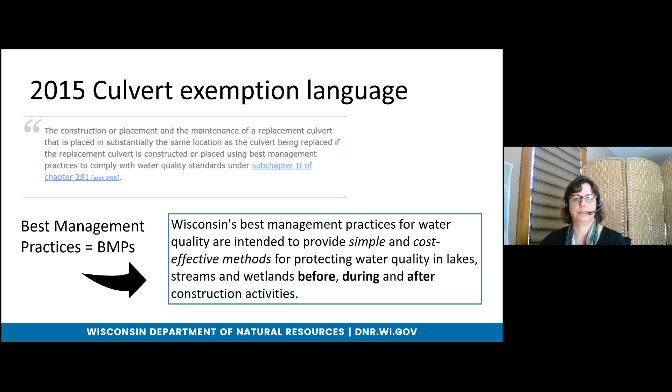So early coordination with the DNR is key. We may have an on-site meeting - we're not doing that right now, but hopefully towards summer and fall we'll be able to do that again. You want to be looking at if the culvert or road is taking a beating, and the transportation liaison can have that conversation with you when they're able to come out. The transportation liaison would also talk to our regional experts regarding navigation to determine if navigation is an issue at the crossing and how a structure would accommodate that.

We're also going to look at threatened and endangered species and talk about habitat connectivity. Dale showed some structures that included not only aquatic organism passage, but also passage for terrestrial species. In some parts of the state, we have some really rare species of plants right next to the road, and we can talk about how to avoid those or how to best manage that within your right of way.

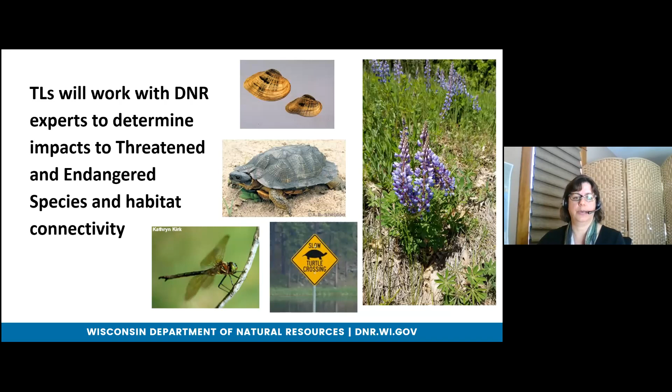As Dale mentioned too, sometimes a ditch isn't a ditch. It may be a stream, or it may be really important ditches, like the ditches that Northern Pike use in the Green Bay area. So again, another reason to talk to the liaison and have a conversation about what you're looking at.

When it comes to ditches and ditch maintenance, sometimes you need a permit and sometimes you don't. We have lots of experience working with water and roads and water next to roads. So coordinating with DNR and Army Corps on a solution that is good for your road and also impacts the wetlands and waterways less is another reason to have that conversation with us, and also to determine if you do need a permit or not.

So again, we're here talking about properly sized and placed culverts. Structure is going to be more resilient to floods, which means reduced closures and safer roads, less debris getting stuck. Less maintenance cost. Improved stream connectivity brings healthier fish and wildlife populations, improved water quality, increased recreation and tourism benefits. And what it all comes down to is a longer structure life is money saved.

On our DNR tab, another thing you can check out is the Learning tab. On that, we have tools to assess road crossing structures, contacting our experts, some of whom are on our call today that you're going to be hearing from next. Tools for culvert inventories and tips for assessing the structure and using LiDAR, and also presentations from our previous road stream crossing workshops.

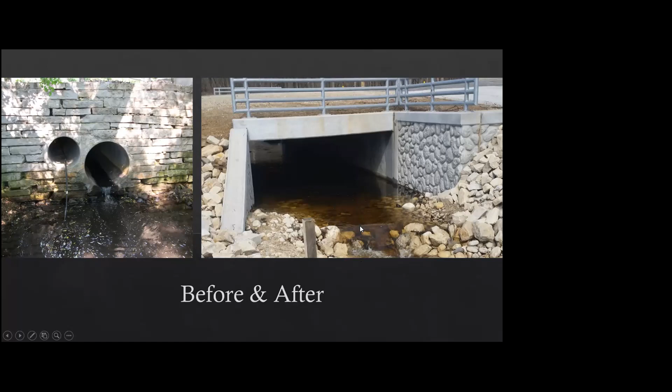Here's another structure. Again, this is a small installation, but you can see that pipe on the right is set deep, with natural bed material starting to mobilize into it. And it doesn't have the plunge pool anymore that the before picture has.

And here's another one on a local road. This is a bottomless pipe arch that was replaced with a round pipe. I mean, the round pipe was replaced with the bottomless pipe arch.

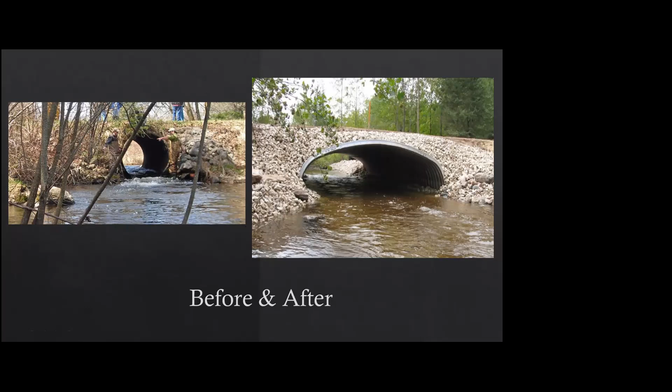The reason I show these again - I'm not going to have time in my brief presentation to go over how to construct, nor am I an expert in that field, but I just wanted to give you a flavor for what a structure with aquatic connectivity looks like.

Very often in construction, if the design folks are not talking with the construction folks, things can happen in construction that you worked so hard to address in design. And oftentimes with these aquatic connectivity structures, you're going to be setting the structure, if it has a bottom, very, very deep compared to a conventional design, trying to get underneath that scour line, that lateral adjustment potential, trying to get deep into the bed so that it lasts the life of that structure and doesn't have to be replaced sooner.

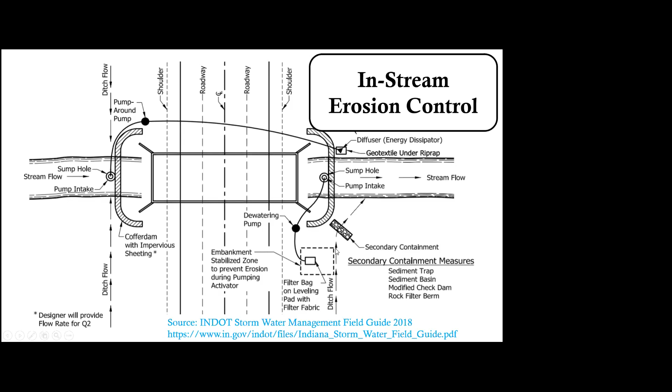So I'm just going to step through the erosion control procedures when you're actually in line with the stream doing construction of the new structure. This is taken from Indiana DOT's best management practices for stormwater, their field guide. So this is not from the state of Wisconsin, but I feel like it depicts pretty well the situations we deal with here in the area. That's where this drawing comes from, and I'll step you through it.

The first in-stream type of erosion control to protect water quality that we're going to address are the impermeable barriers - some kind of impermeable barrier upstream and downstream. The flow comes from the left, goes to the right in this photo, and the blue C lines here and the reverse C are the impermeable barriers. So that could be sheeting, that could be sandbags wrapped in plastic, depending on what kind of stream you're dealing with. This is just a photo, an example of an in-stream barrier.

Impermeable barrier, the water is coming from the top right to left. This is a trench box wall. You can be creative with this stuff, using an I-beam to give support to it. The water then unfortunately makes a 90-degree turn, which isn't optimal, but if you're putting the culvert right back in where it is, sometimes you have to deal with not having it just right to make your structure sit well in the crossing.

So it takes a 90-degree here, goes into what's called a bypass culvert, and comes out the other side through the culvert. The benefit with a culvert is that you can bury it if you need to get access to the work area.

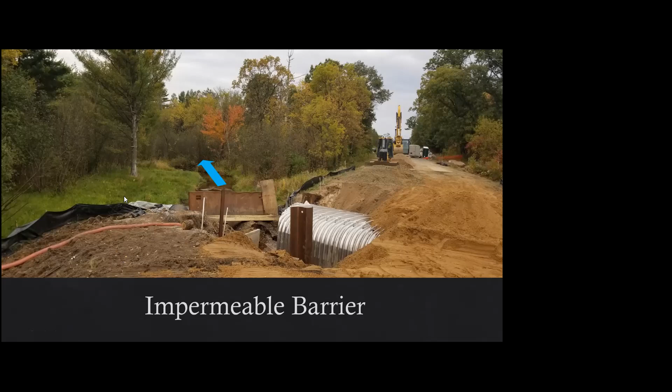There's also water bladders and a whole host of other impermeable barriers out there. We don't want to use dirt as a barrier. It's not impermeable, and we've seen them fail. So that's something we would not recommend as a best management practice.

Moving on with this diagram, now we've got our impermeable barriers in. The water is going to come from left to right again. It's going to come into an intake, and now instead of bypass culverts, we're going to talk about bypass pumping. So you're going to have some kind of intake, some kind of sump hole here, and a pump, and bring it around to the other side with some erosion control, energy dissipation on the other side.

This could be a bypass pumping setup, again bypass culvert, bypass channel, if it's going to be a very long project. We want to make sure we're keeping the waterway completely fed during construction so that we don't dry anything up and we don't disturb too much of the stream while doing this construction. There will be temporary movement barriers with pumping and sometimes culverts, but again, we want that low flow, that Q2 that Dale talked about, to get passed to keep the flow steady.

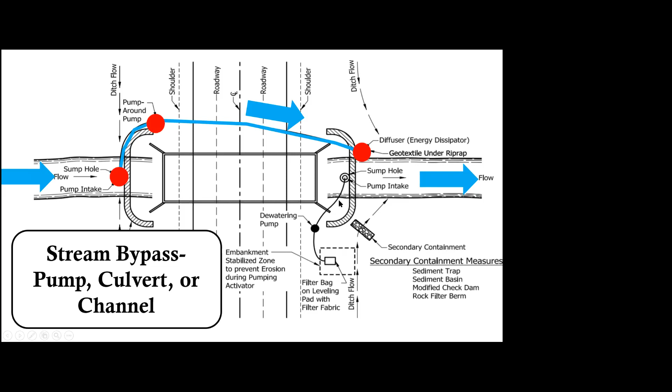Here's another diagram to go along with that. Your intake is in some kind of sump hole. I've seen these graveled, there's many ways to do it. I've seen a slitted barrel full of gravel where they put the intake. Many different ways to get this work done, but it's not on the bottom of the stream, it's off the bottom. Then you have your intake, usually a grate or something so you don't suck up wildlife or other critters. And it goes up and over that coffer barrier to the other side.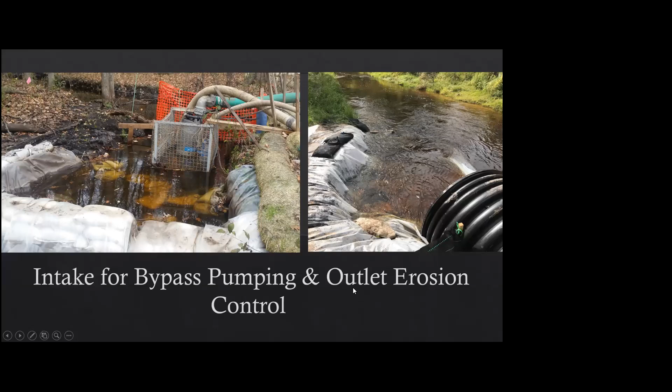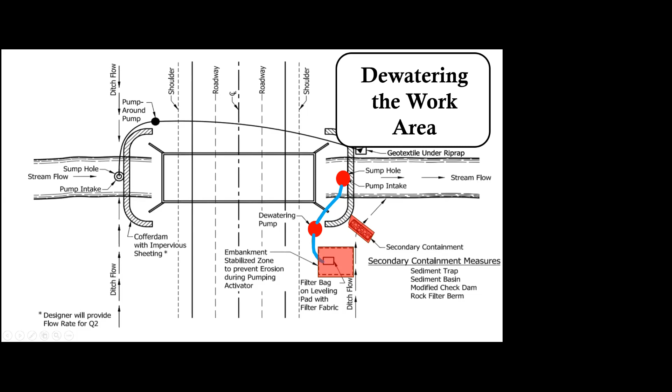Within the work area, this water is going to be turbid, and you're going to need to pump that out so that you can work in the dry most times. Again, you pump it out, put it into some kind of dewatering mechanism, and have some kind of secondary containment. Here's an example of that. Here's a sump with a pump, and the water is coming out on the downstream end of the project.

Again, this is the dirty water that needs treatment. Here is a dewatering mechanism. This is a filter bag where the water goes to. That pumped water comes into here, goes through the pores. The larger sediment remains in the bag. And here's the secondary containment. In case this were to fail, you'd have a secondary containment before it went off toward the waterway.

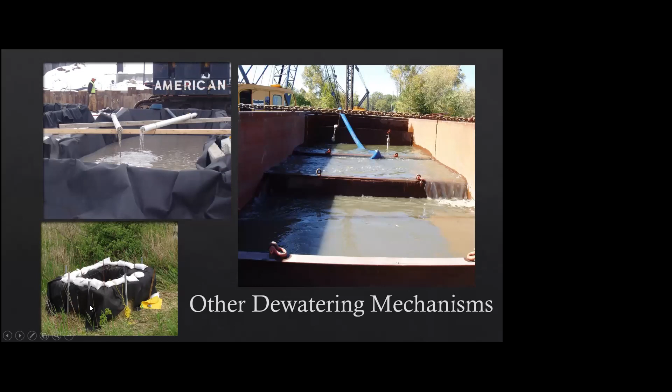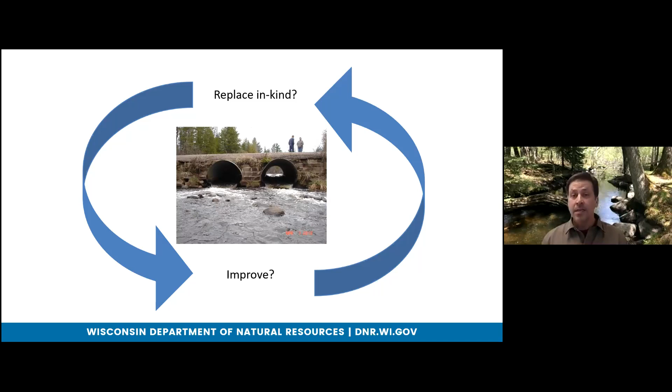But over the years, obviously each site is unique, but what I've seen over the years is generally what happens is most of these culvert projects, they really are scoped out site by site by site. A lot of times it's often when the culvert has failed or it's close to the point of failure. And so with that, decisions often have to be made on a very short time frame. And there's also a lot of times not a lot of information about, well, what's the size of the watershed, or how long did that culvert exist? What was the lifespan of the culvert that was there previously? A lot of times not even that is known.

So without a lot of information available, that can lead really toward a heavy preference on decision making that points to, okay, let's just put in, even if it's a problem site, let's put something in kind right now and we'll see if it gets us by for a few years.

And then we'll see sites like this where right when you think you've seen every kind of road stream culvert situation, you'll get one that definitely stands out.

So taking a step back, it seems like most people agree with the concepts of, hey, it's a good thing to increase the size of culverts. It's good to think about flood resiliency, addressing maintenance issues. I think it's also really key, and we wouldn't be doing this issue justice if we didn't realize that there's also a lot of challenges out there.

The transportation infrastructure funding is a very complex topic, right? And the reality of it is that there's county highway departments out there that are trying to get 70 years or more out of just maintaining the asphalt road surface. And that's even with Wisconsin winters, so asphalt that should really realistically only be lasting 20 to 30 years.

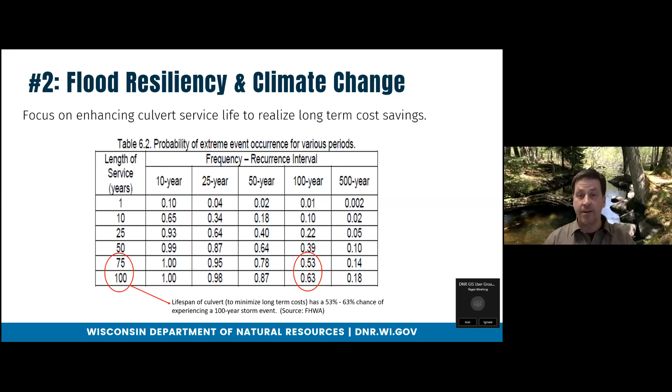And then you overlay that with what people are predicting - it definitely seems like we've experienced a lot of extreme precipitation events over the last decade. When you look at the climate change perspective and the different modeling, what experts are predicting for us in the future in the Midwest and Wisconsin, increased storm intensity and frequency is going to keep coming up against our transportation infrastructure. So it's something we need to be thinking about now and planning for as best we can.

Thinking about the benefits of culvert inventory - and this is something else Dale did a really good job covering - we know there are certain watersheds that are a lot more flood prone than others. Dale covered this, it relates to gradient, soil, water infiltration, wetland storage, et cetera. But the benefit of a culvert inventory is we can look at the subset of culverts in these flood prone areas and start emphasizing where we want to focus flood resiliency efforts.

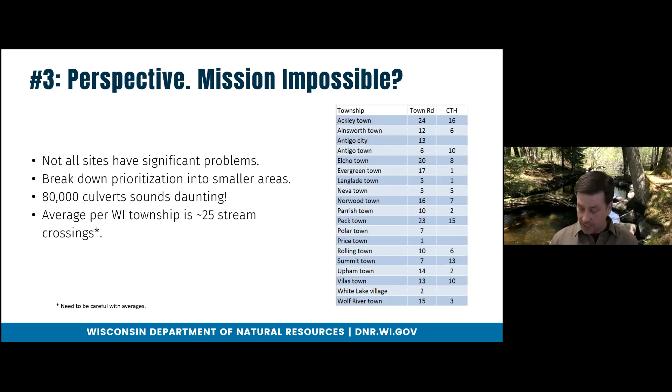Culvert inventory can also be key to opening up opportunities for cost share. There are a lot of resource agencies that see a high return on investment in cost sharing culvert inventory projects and road stream restoration projects. For example, on the DNR website under the funding tab, you'll see summaries of different cost share options available.

It's pretty powerful when applying for cost share. If you say we know there's a problem site here, that might be a compelling story, but it's a lot more competitive if you say, out of all the crossings in our township, county, or watershed, this is our top priority. That goes a long way in making it competitive for funding - a culvert inventory can really open up a lot of funding opportunities.

Even at the FEMA level, thinking of flood resiliency, there are likely to be a lot of opportunities in the future using culvert inventory data to make sites eligible for FEMA flood mitigation funding - funding to improve a site before it's damaged in a flood. FEMA's approach is really centered on cost benefit analysis, and a lot of that can be integrated with road stream crossing inventory efforts to open up that funding, which seems like it will become more available in the future.

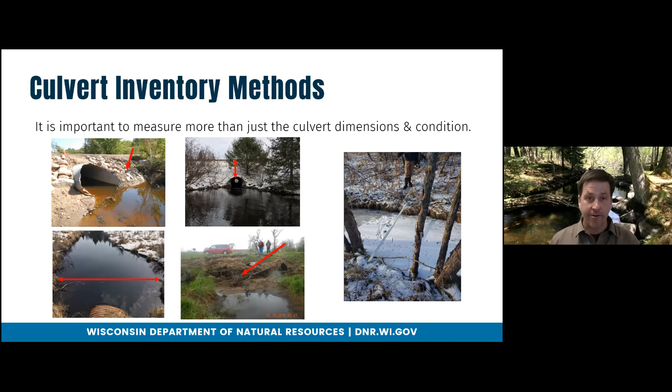This is for take-home reference. If you're interested in culvert inventory, I would love to have a training specific on inventory methods in the future. DNR and many others are partnering with Michigan DNR, and they've come up with great culvert inventory methods—I encourage you to check that out. It's in an ArcHub environment, so you get publicly available mapping, and you can collect data on the phone. It's a great resource for carrying out culvert inventories.

There's also great work going on in Wisconsin recognizing the importance of culvert inventory data. The Wisconsin State Cartographer's Office is working on a culvert inventory community of practice—incredibly smart people with geospatial databases trying to put the pieces together so that even though different stakeholders might record slightly different information, the geodatabase they're building can incorporate all that data into a single clearinghouse.

There's also great work out of the Northwest Regional Planning Commission, looking at if a culvert point fails, what's the economic impact of that failure—things like daily traffic, detour routes. These exciting developments help us look at the economic impact and how to feed that into a FEMA cost-benefit analysis, intersecting it with road stream crossing inventories. There's a lot going on with Wisconsin DOT, US Forest Service, and county highway departments regarding culvert inventories in Wisconsin.

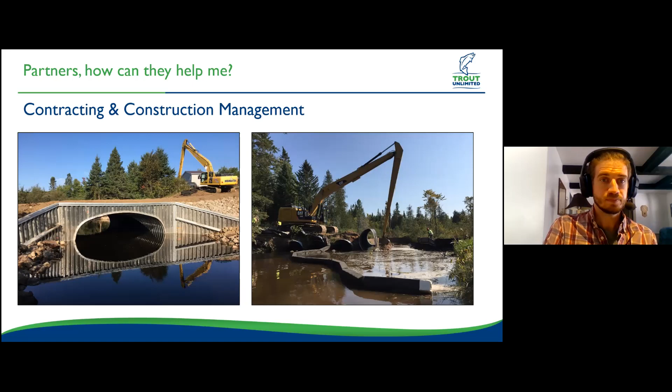And the last partnership opportunity I want to touch on is post-construction monitoring. Oftentimes when you're using grant funding, some sort of monitoring is required to show did you accomplish the goals that your funding commitment was supposed to result in. And that's where groups like the DNR or U.S. Fish and Wildlife Service doing electrofishing surveys for fish passage, if that's a metric you're looking at, can be helpful.

Or even bringing in a group like TU, or another watershed group of people trained in the Great Lakes inventory method, can complete a post-construction inventory that shows what the inventory score for flood risk and fish passage are post-construction. And then you can contrast that with the initial inventory, so it gives you that nice snapshot on how things have changed based on this inventory method.

This is kind of a quick overview of what partnerships can provide in some cases. It's not an all-inclusive list, and each partner is going to be able to provide more or less. Just speaking from Trout Unlimited, we've been on projects where we assist on one of these areas I've talked about, and we've been on ones where we do all of it. So it's a variety of looking at how much crossover the project has with our partners' priorities and also Trout Unlimited's priorities, and also just what the actual need from a partner is. Some don't need a lot of help, some could use a lot more help.

Next thing I'm going to talk about is a quick overview of funding. I've broken this down into funding categories based on what the project's attempting to accomplish.

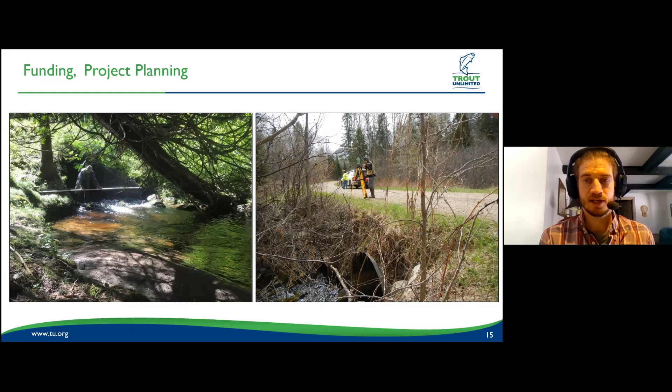Aquatic organism passage, obviously we've talked about it a lot today, is a big ticket item when we're talking about culvert projects, and a lot of natural resource funding agencies, nonprofits, and private foundations focused on the environment care a lot about this. So there's a lot of programs from a variety of funding sources. Some examples are the National Fish and Wildlife Foundation, which focuses a lot on this through their Sustain Our Great Lakes and Bring Back the Natives programs, and U.S. Fish and Wildlife Service has the National Fish Passage Program and the National Fish Habitat Partnership.

As I mentioned before, the Wisconsin DNR has the Surface Water Restoration Grant Program, which we use a lot in the state for our aquatic organism passage projects. And then groups like the National Forest Foundation, the Trout and Salmon Foundation, and even Trout Unlimited can provide some funding in cases for projects that are going to result in benefits to aquatic organism passage.

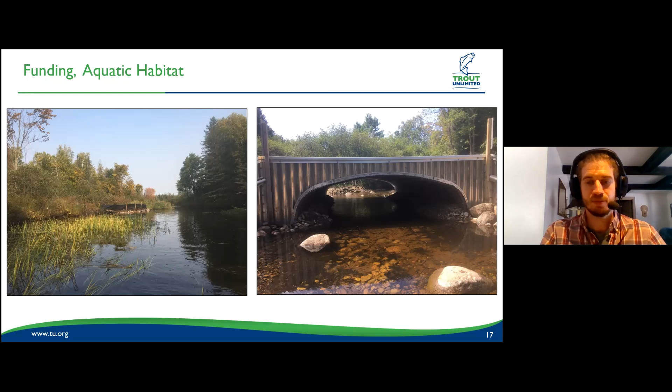Finally, I want to talk about flood resiliency and infrastructure. This is really an emerging way that groups like Trout Unlimited are approaching projects. There's a lot of hazard resiliency programming out there from groups like FEMA, Wisconsin Emergency Management, Departments of Transportation, and even some groups like the National Fish and Wildlife Foundation.

They have a resilient communities program, and a lot of this is focused on finding ways to address the emerging climate crisis and increasing flood issues we're seeing across Wisconsin, the Great Lakes, and the United States as a whole, with solutions from both natural infrastructure, like putting in or restoring wetlands, and our gray or built infrastructure like road stream crossings.

There are a lot of these programs out there that, if you can show repeated flood damage or risk of flood damage at a site, can unlock a significant amount of funding. Just speaking about FEMA as a whole, they had hundreds of millions of dollars just this past year for projects like this. So it's an emerging area with a lot of opportunities.

They're complex, they're new, they can be difficult to navigate, but that's where partnerships plug back in. Like I said, with grant funding and cost share, we're working with Forest County on a FEMA proposal right now to their new Building Resilient Infrastructure and Communities program. It's a brand new program, it's growing up and we're trying to figure out how it works. Working as a partnership has allowed us to do that, whereas going it alone might have yielded different results.

One last thing I want to say about funding before closing this part of the presentation: a lot of times these projects have more than one benefit. You'll often see benefits to aquatic organism passage, aquatic habitat, and flood resiliency. You might have your primary reason for prioritizing a project, and that might be the area you want to go. So if you're saying this is a flood resiliency project, I'm going to apply to FEMA for this. But don't forget to hit on those other benefits, because that can take you from being just another flood resiliency project to a much more competitive project, since you're showing how this benefits the entire system.